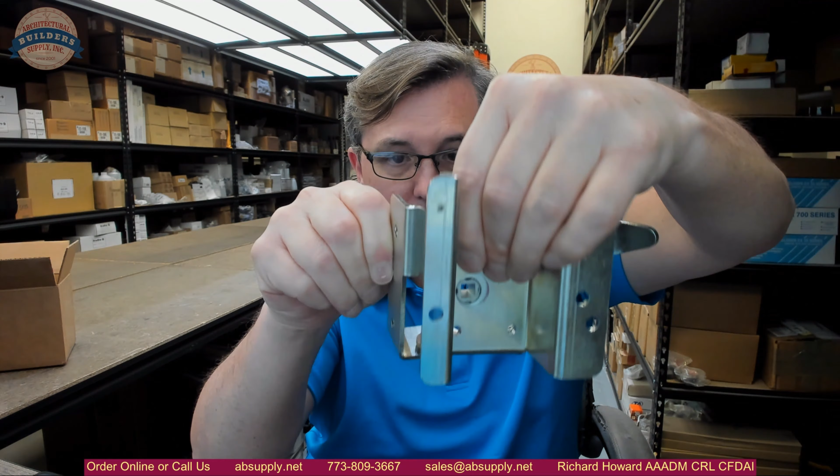Okay. Then your bracket, your latch assembly in your bracket will, of course, come down and allow you to latch and also lock at the same time. So your padlock's going to line up, your latch assembly is going to line up here, as you can see. So a real smart design that they've got here. They've cleaned up the design, in my opinion, a little bit from their prior version.

Okay. So let's take some dimensional properties. If you're looking at this and you have a roof hatch that's older than a couple of years old, you probably don't need this hardware. It's not the right material. Not that you can't possibly make it work, but this is for their Diamond Series.

Overall length of the strike staple bracket, about 3 9/16 overall width. Its overall height, about 1 3/8 inches. Its overall projection of the staple, about 1 3/4 inches, to the center of the hole is about 1 1/8 inches.

That strike comes off about 7/16. The mounting bracket, that overall width is about 3 3/4. Overall height, about 3 5/16. That'll have an overall projection of about 1 3/8 inches.

Okay. Overall projection of the staple portion, about 2 3/4, to its center line is about 2 3/16. Then, of course, again, your fasteners. So the purpose of this video is to really help determine, to permit you to determine whether or not this is the right item for your roof hatch. The visual review, the dimensional review, the link to the parts drawings that are there will certainly, the intent is that it is to help you decide if this is the proper material or not.

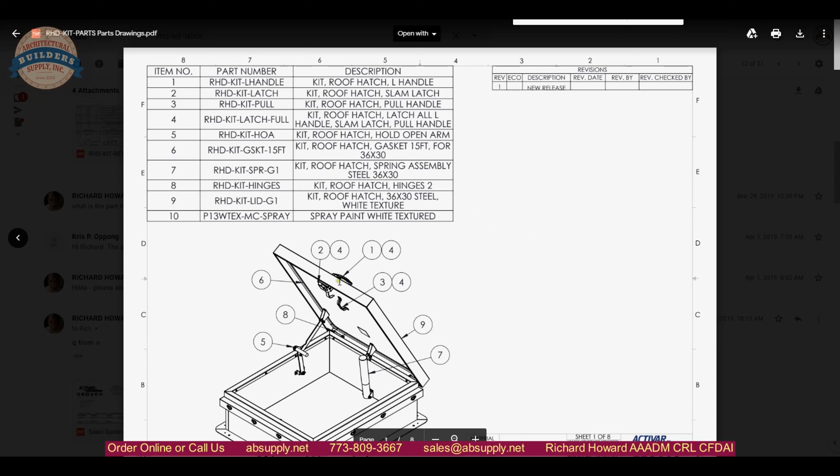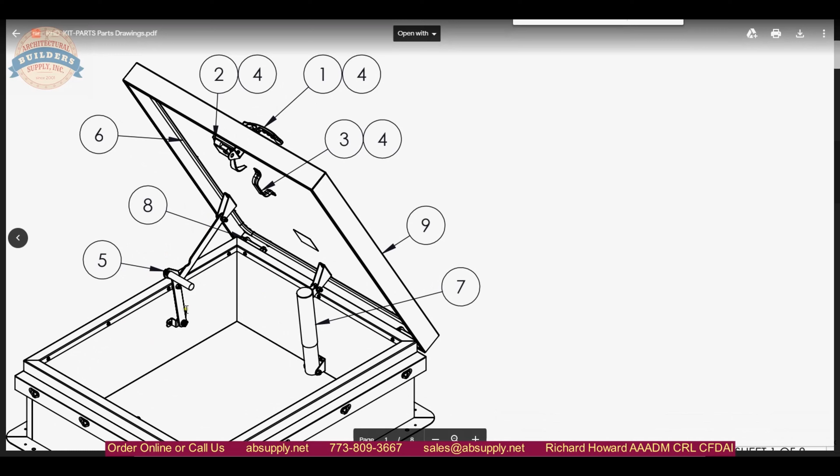Now, this is that link that we were discussing here, and this is the file showing all of the parts possible on their RHD roof hatch diamond series. Obviously the typical material is going to always be the lifting mechanism, the hold open bracket, the latch assembly, and all of these are obviously detailed here for you to be able to review, pull part numbers from, which is the important part, which is up here. And there are, I believe, 8 pages to this document that will allow you to go through all the parts.

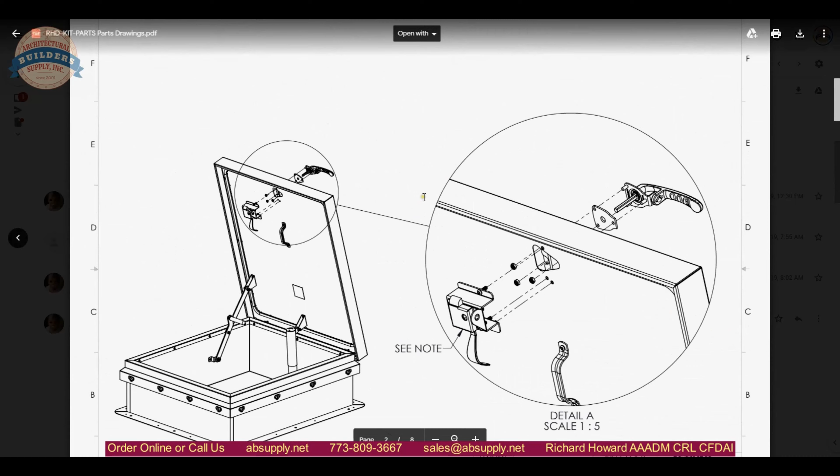So we're looking at the latch assembly, and that is detailed on the second page here, and of course its strike. It shows you what it is supposed to look like when it gets installed.

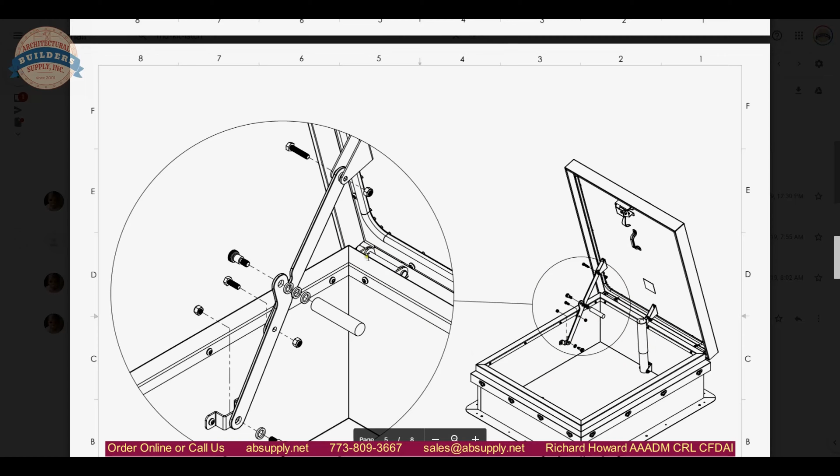As you scroll through, you'll find other parts: the pull, the hold open bracket. That would be considered a left-hand hold open bracket. That lifting mechanism they've got right in the center of the unit. Hinges you can see here, and gasketing. Let's see if they detail those. Here's your gasketing detail. That can be purchased as well.

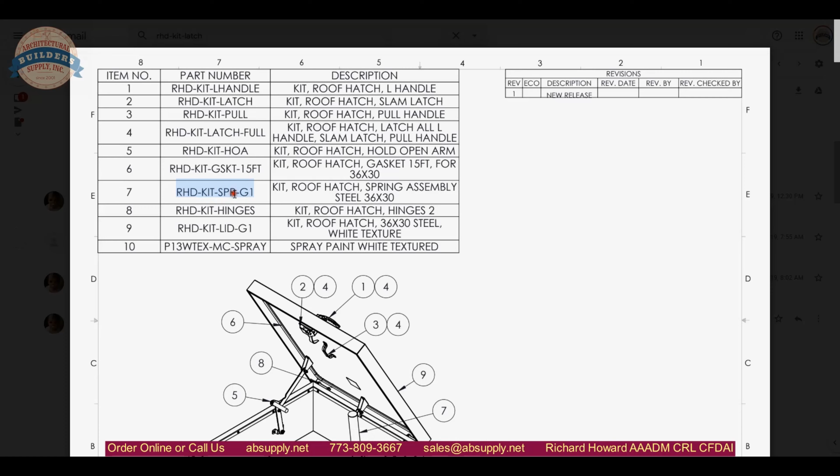Your lifting mechanism, that is part 7. RHD Kit SPRG1 is that part number. This might be a reference to the lid assembly.

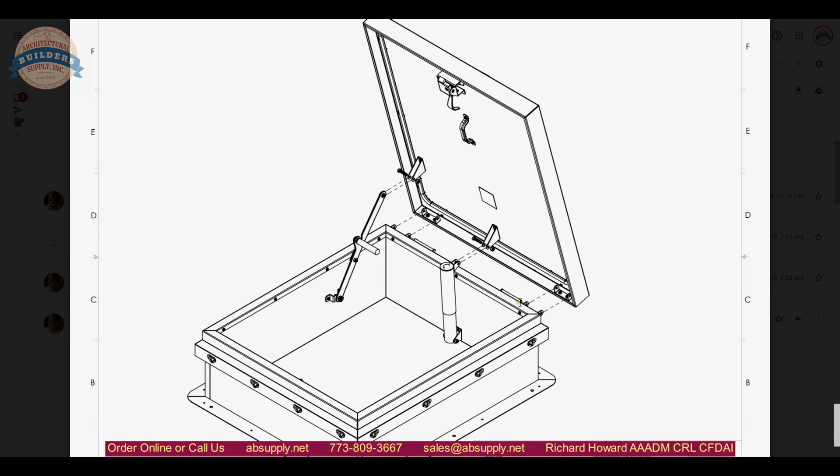Those hinges, it's a 2-piece system, 2 U-brackets that nest together with a pin. I believe it's a pin with a hole drilled in it and then a cotter pin that holds it together. Your outside handle is also referred to here.

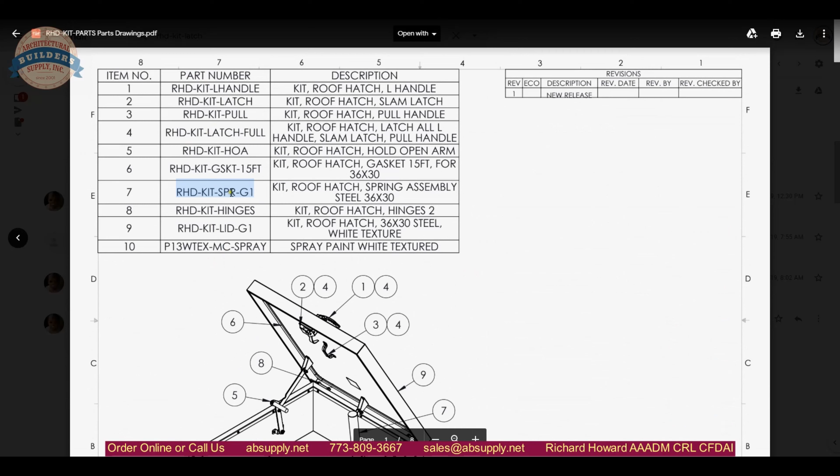All of this can be bought as a single unit. But the important part is that all of this, all the part numbers, are detailed here. Okay, that wraps up this video, and thank you very much.